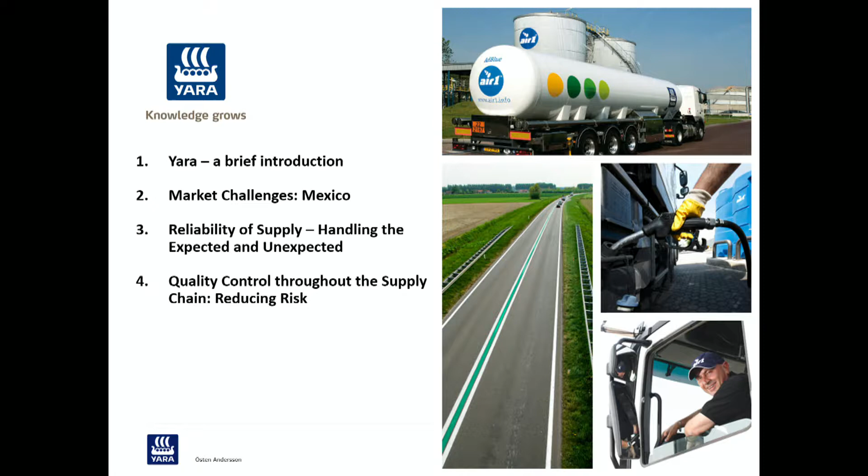So just a very quick introduction. We'll go through an introduction of Yara, in case you don't know about us, market challenges we can potentially expect in Mexico, not that we can foresee the future. Reliability of supply, handling the expected and the unexpected. Being in North America and working in US and Canada, every day there's both expected and unexpected challenges. Quality control throughout the supply chain, how do we reduce the risk?

So just about Yara, we certainly are a global company with global impact. Over about 12,000 people employed, we operate in 50 countries but sell to 150 countries. You can tell we're a fertilizer company, so we work a lot with farmers, of course 15 million, and produce a lot of tons of grain to feed the world. So our goal is to feed the world and clean up the air, and we clean the air for over 50 million citizens and growing.

Here's the snapshot on a map basis of our Yara global network, where you see we have both major plants and offices and sales across all of the world. Very heavily in Europe, we're based in Oslo, Norway, have a lot of production in Europe, and a lot of it's currently imported to Brazil, to US, and then of course used in Europe.

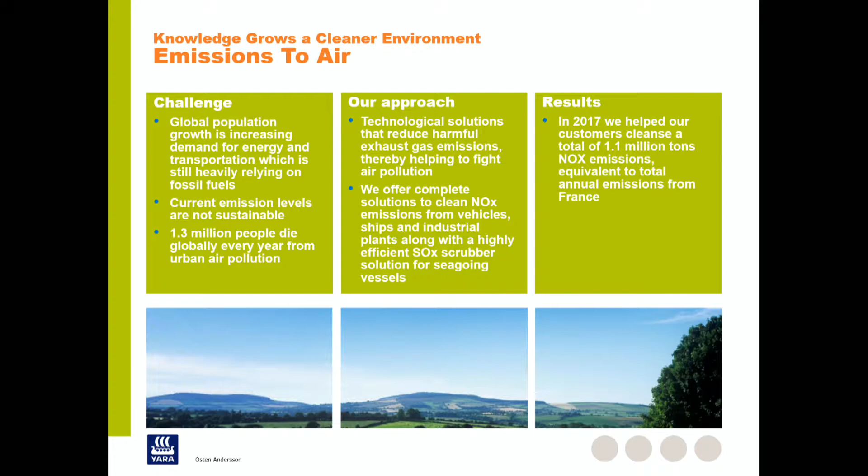When we look at the different challenges, when we say emissions to air control, you've got a challenge of growing population. People are dying from these emissions, we need to clean it up. There's only more and more people, more and more vehicles. We're doing the best we can together, right? So our approach is to build technology solutions that help really get to the end game, and to benefit, as you can see there, the results of the people that we've helped in terms of air pollution control.

About our AdBlue DEF production, we're the world's largest producer as far as overall production of this molecule. We have plants located across the globe, which helps the reliability of course. What's unique about Yara is we have large-scale deep sea vessel shipments, bringing in multiple products of chemical nature, fertilizer basis and others, that help us reduce our overall cost to service the markets by bringing in 18 to 35,000 ton vessels in different parts of the world. We do offer complete solutions to help fleet operators, OEMs, and oil majors, when you're talking about the products, to the equipment, et cetera.

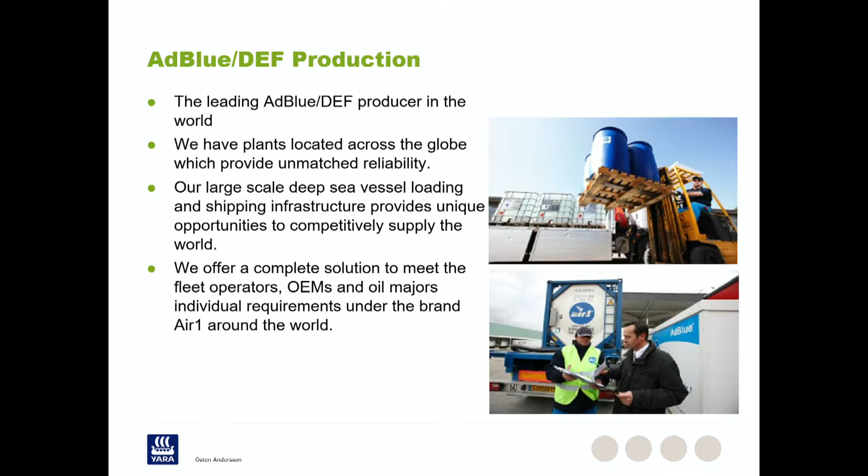So what challenges might we expect here? Supply, will there be enough? And will quality standards be met and kept, and who will provide accountability? Well, my short answer on supply, will there be enough, is yes, no, and yes. So let me explain.

Will there be enough? Ultimately, yes. Mexico will be very well supplied, even if today there is no domestic production. Why is that? Well, obviously very close proximity to US, and many shipments are already coming in from US. Imports from other parts of the world are happening and will continue to happen, and it's easy to do with the port access on both the east and west coast of Mexico. And of course, when you have engine manufacturers involved and major diesel players involved, they are going to demand and make sure that there's enough diesel exhaust fluid to meet their customers' needs.

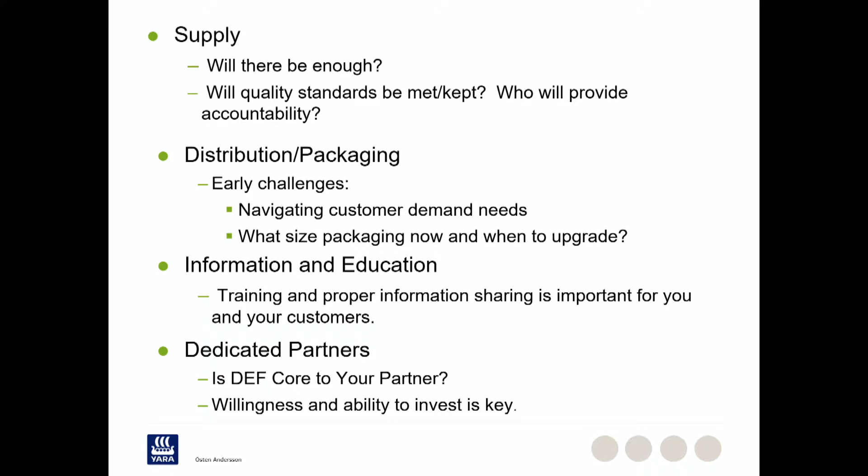Distribution packaging. Oh, by the way, the other point about supplying Mexico is yes, you may have certain shortages.

It's so vast that some parts are going to be easier to supply than others when you look at the map. I did some regional viewpoints, and when you look at it, some parts certainly will be easier to supply than others. So in some cases, you might have shortages or not be as easily accessible to parts of Mexico.

And if you know anything about the rail coming into Mexico from the U.S., there's been a lot of backups because it's been very new. So Laredo, Texas has had huge backups on supplying via rail, because it's new business, plus there's diesel coming in now. So there are some challenges there, but ultimately, yes, Mexico is certainly going to be well supplied, but that doesn't mean there won't be some short-term challenges.

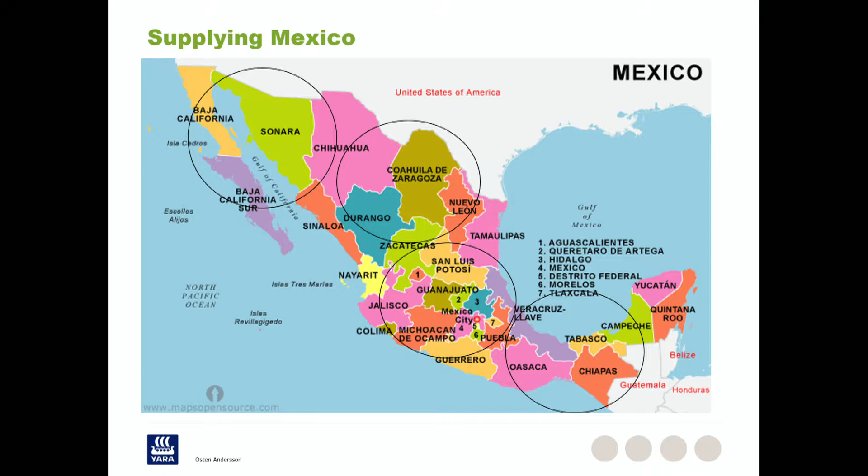Distribution and packaging—just a random example, I'm sure a lot of us in the room will have something very similar. There'll be very big stages of packaging, and I think you'll see all of them throughout the lifetime supply. We see that in the U.S. today, even ones that are in bulk now, but there are some other small trucking companies just getting involved, so they have small totes, drums, and many still have pallets of jugs sitting in their back as backup. They're in all the retail stations in the U.S. still, because if bulk goes down or there's a problem, they do have the small jug packaging.

The other key challenge for distribution, I think, is that it's very hard for the consumers to know what their rateability will be early on. If it's an XYZ bus company or fleet, they may or may not know, sitting in Monterrey or in Puebla, how many trucks they're going to be receiving with the new SCR standard, because their purchasing bodies may or may not tell them.

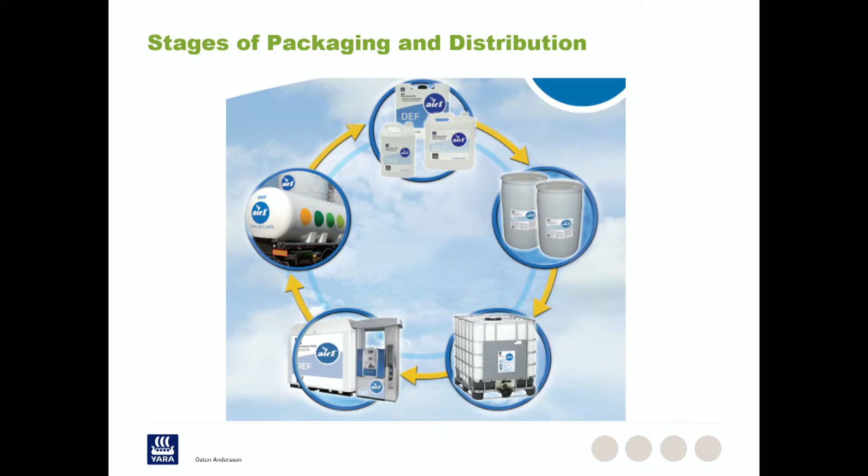Information education—I think that's some of the most important things when someone's choosing their supplier. Can they answer some basic questions and then some of the hard questions? Things like, what have you seen before? How has this happened in the past? What does it mean if there's high sodium or high calcium? Is this going to kill my catalyst? If the urea concentration is 33.3, is that a bad thing, or what is it doing? Well, not really—you're just maybe burning a little more urea, or wasting what you're sending them. But these are things I think is important for us in the industry to be educated on and share information, because the consumers are certainly going to demand it.

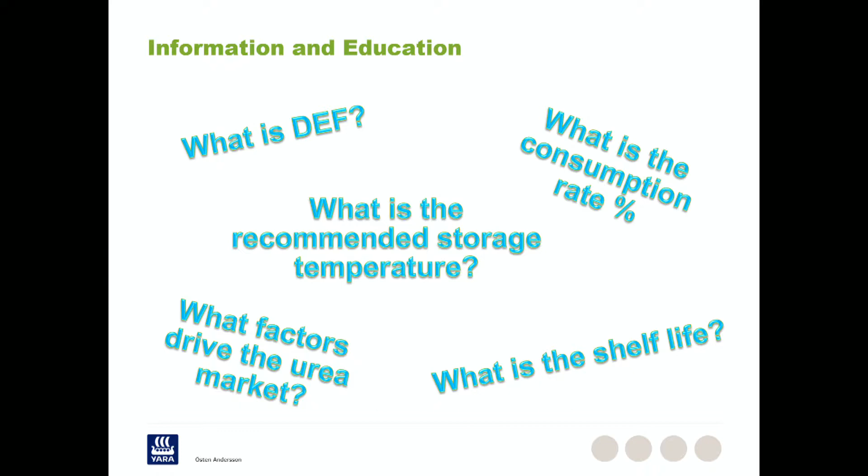Reliability of supply, size and scale is certainly important in our eyes, because we know of the unexpected things, as I talked about. Like fuel—these vehicles won't run without this product. It's not as immediate as if your fuel's out, you can't run; it's more of a degrading process if you don't refill. But still, if this product isn't readily available, you'll have a challenge and your fleet will not be happy. Supply disruptions and shortages are inevitable, whether it's coming from US, Europe, or domestic production. So the key for a fleet is to understand what your supplier has as redundancy, backup, and emergency case scenarios.

As I said, the demand rates will vary, so you really need a good plan to be able to supply these customers, because the demand they're going to put on you will be high, especially when it really starts ramping up in the next couple of years. I guess the other point is consumption percentage—Fabrizio, you mentioned a bit about that. I think in the US now we average about 3%, but it's on the way up to 4%, and you mentioned 5% with the new standard. Approximately, maybe. So that changes your rate too, of how much the customers are going to need.

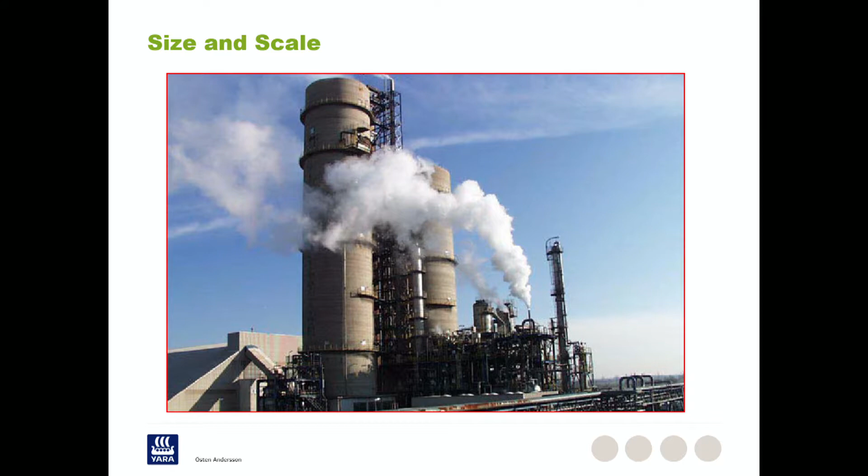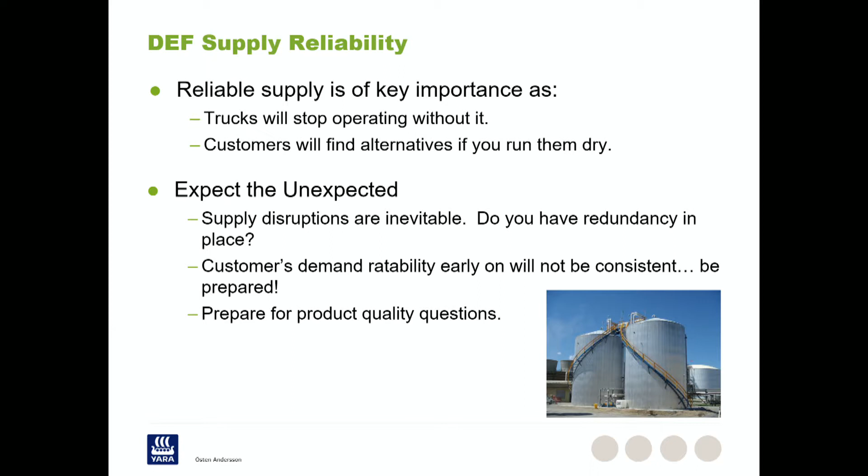So handling the unexpected, I talked a little about it. Trucks can't operate without it. They'll find alternatives if you can't supply them, of course. Supply disruptions are inevitable, and be prepared for quality questions, because that's probably the one we get the most—'my sensor on my truck is doing something wrong, and it says it's bad urea.' Nine times out of ten, the urea hasn't been bad; it's either been a sensor issue or whatever. Not to put down any Daimler or anybody here that might be part of that, but that's what we found sometimes in the past.

So quality control throughout the supply chain—they asked me to talk a little about our experience, all the way from the packaging to the bulk, and where the potential risks lie. One thing we like to say within Yara is, when you add DEF, add care. It sounds kind of cheesy, but it's a key message that purity is essential, and it's important to talk to our customers about that purity. We can only do so much, but we'll show examples of how, at the end of the supply chain, people touch it—and there are people in this room who can help us with those situations. What they do with it and how they handle it is also important. So it's important for us to give them solutions, not just the product solution, but solutions to keep the product clean, clear, and on spec.

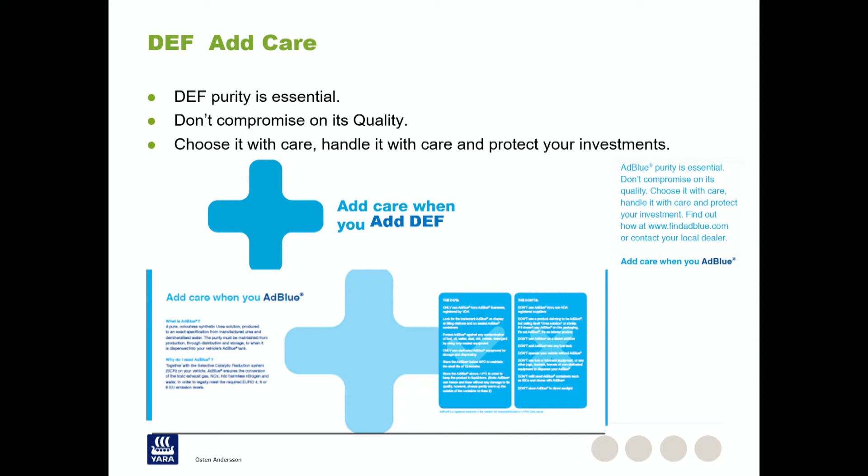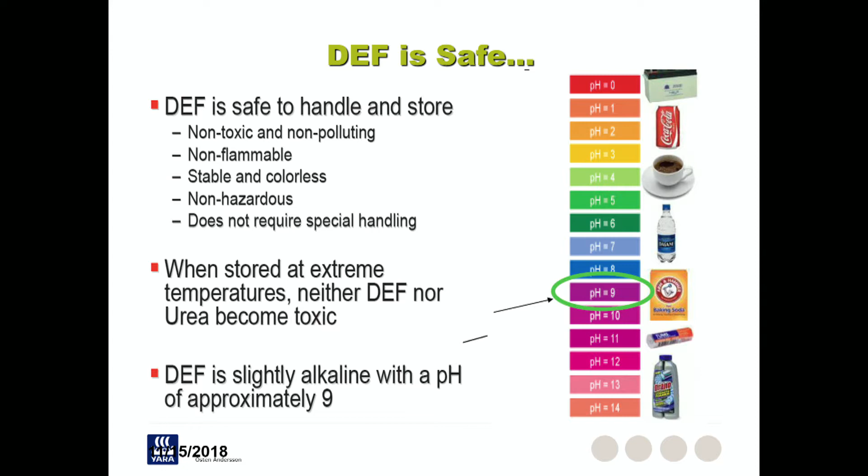In general, DEF is certainly safe—it's non-toxic, not flammable, stable, and non-hazardous. So it's nice that way for us, producing it, shipping it, etc. But you have to worry sometimes about temperature. In Mexico, that might be a concern about the heat, and having it under protected areas so the heat isn't beating down on your tote. That's certainly key—it takes months for that to happen, but still it's something important for Mexico. DEF has slight alkalinity, a pH of approximately 9, but other than that, it's certainly a safe product.

So there are multiple contamination risks in our DEF supply infrastructure and supply chain, all the way from here, moving into storage tanks or intermediate storage tanks. I guess from our experience, some of the biggest risk is down here when you're handling small packs and other bulk or mini bulks, only because a lot of those people are used to handling diesel or lubricants.

If they do any cross-contamination from the gloves they use, from the hoses they use, those are the things we've found to be the biggest challenge as far as discoloration or finding oil in the product. A lot of times it's just handling on the bottom end, especially with drums and totes. But anywhere in the chain, there's a possibility of contamination risk.

So having a good supplier from day one who knows how to handle the product, has handled the product, that's key.

And there's some trucks. I didn't even know that existed.

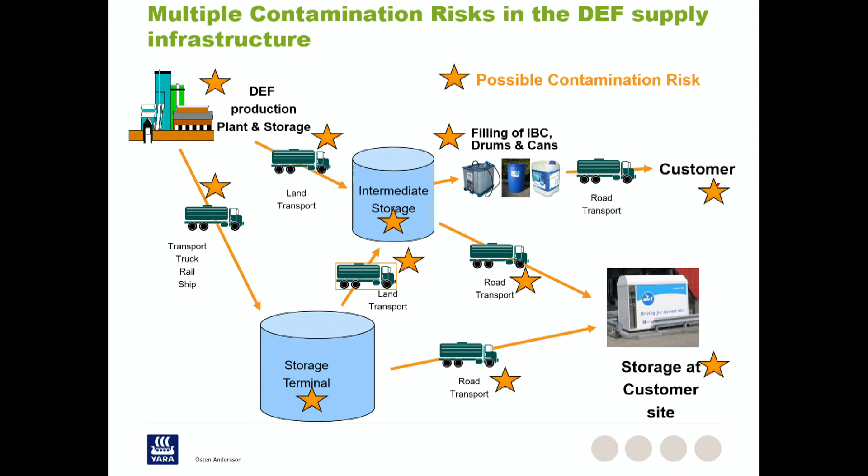So, anti-contamination measures for filling IBCs, drums, and cans. The main contamination risks here are non-dedicated filling equipment, materials in contact with DEF that are not compatible, whether it's hoses or gloves, returned IBCs that aren't cleaned, maybe weren't reconditioned the right way, had mixed with off-spec product or other product before, or were filled in uncontrolled conditions. How do you solve against that, or what steps can you take?

Dedicated filling equipment seems to make sense, but not all will do it. Drums and cans should always be one way. We don't advocate drums that are refillable. It can be done, and there's packaging out there, solutions out there, but typically we look at closed IBC solutions where you can do refilling in a closed environment to really protect the integrity of that product and the integrity of the tote.

And having good inspection procedures if a tote does come back, checking if there's anything loose, if there's been a stamp or something clipped on to make sure it hasn't been broken into - the seals need to be inspected.

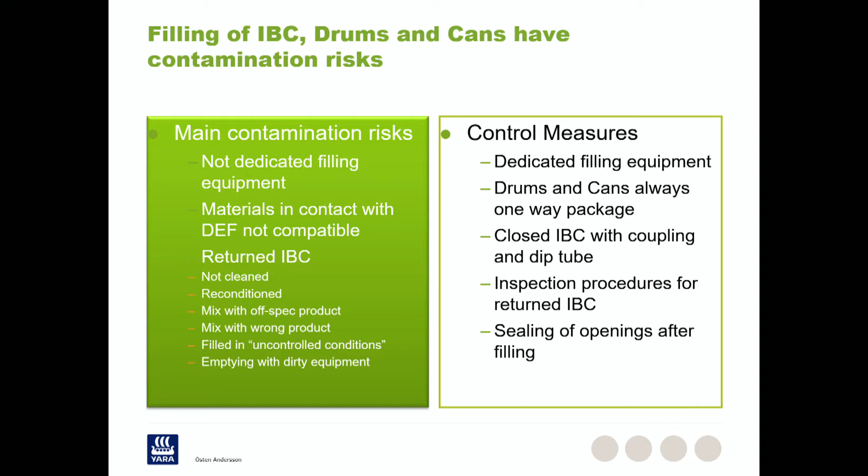How about for bulk? Our biggest things are non-dedicated transport vehicles. We've seen people say, well, I had my fuel oil in there, can I just wash it out and put diesel exhaust fluid in there? And for our purposes, we say no, absolutely not.

There are other products that are maybe less hazardous, like UAN, urea ammonium nitrate. Through a rinsing process and a cleaning process, you can usually get a certification that it's been satisfactory to refill with diesel exhaust fluid. But other materials that are cross-contaminated in the bulk process, you need to be very careful of, whether it's a poly tank or stainless steel, et cetera.

So our control measures use dedicated transport vehicles, which is hard in the beginning. As a distributor, maybe you'll have some, but maybe some of your third parties won't, or they don't handle the product regularly enough, so you'll have to mandate getting washouts. We've talked about certificates - if somebody comes to our station without a dedicated truck, we mandate certificates of cleaning to understand what their last three products were. I think it's a very good, safe process to follow.

And inspect after loading, whether you're loading a truck or a rail car - check to see if there's anything floating that doesn't look right. Maybe take some retention samples. I think one of your biggest insurance policies is to take a retained sample. So if your customer calls the next day and says, hey, I just got this product and it's off spec, I can go back and trace it right to the specification and the sample I have, to verify that we had an on-spec sample before it went into your vehicle. Having that backup is security for you and insurance.

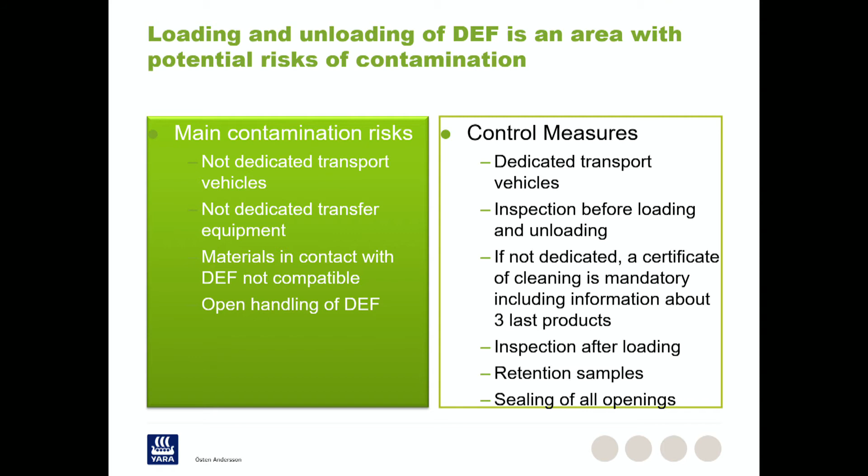And for dispensing equipment, if you have non-dedicated equipment using lubricants in the same terminal or facility, make sure they know to use the dedicated pumps for the DEF. Make sure that's not laying on the ground, or in oil or dirt. It seems basic, but we've seen it. And just overall wrong filling, or filling into the wrong tank.

Control measures: dedicated equipment designed for DEF use. There's a lot of companies in the industry that can make sure you get that type of equipment. Closed IBC, we've talked about with dip tubes. It's been the best thing we've ever done. At first we weren't sure, but now we know it's the best thing you could do because you can reuse your totes and get the best economics while being safe.

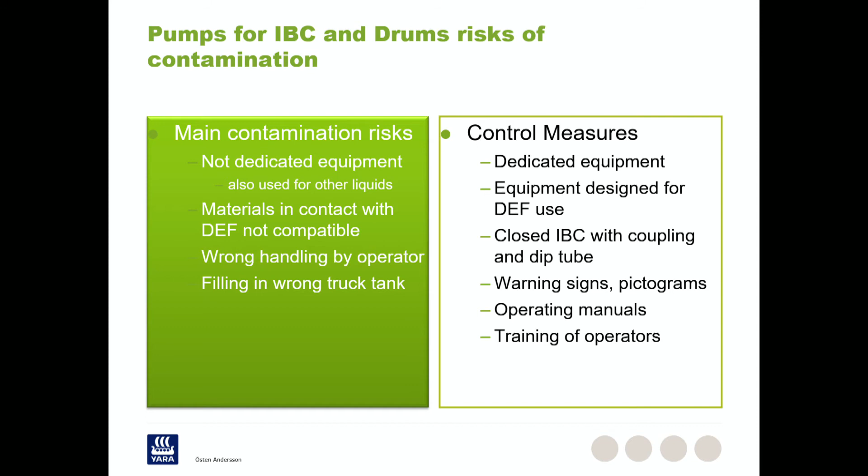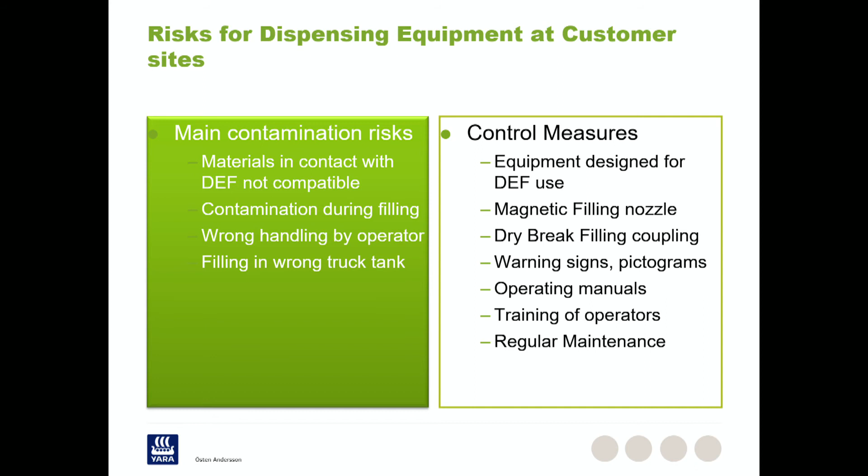And with that, I did stay under my time, so I think we caught back up. I really appreciate the time. It's fun, it's exciting - every day has been a new challenge in this marketplace for us. And we're looking really forward to being here in Mexico and continuing to grow with all of you. So thank you.

Okay, yep, there's one question here in the front. So, yep, microphone's coming. I don't know if I need the... it's going to be in English. Great job, Chad, thank you.

Just because it's current events, and I know this is going to sound like shameless self-promotion, but one of the other things we're seeing a lot in the industry in the U.S. - and I'm privy to this because I'm currently monitoring a group of industry individuals trying to revise API RP 1637 - is cross drops at the bulk locations. It's been a big issue in the United States. I've gotten more than one example in the past month of people dumping their recreational vehicles into the DEF tanks at truck stops. That sort of thing.

So I think it's important to mention, it fits in with one of your slides, that proper labeling of the different things that can be at a distribution terminal or at a truck stop matters. I think it's important for Mexico to make sure there's some sort of visual standard where they agree upon a color system. API does have a standard for that - it's RP 1637 - but obviously I encourage them to take it upon themselves as well. So I just figured it was relevant to the conversation.